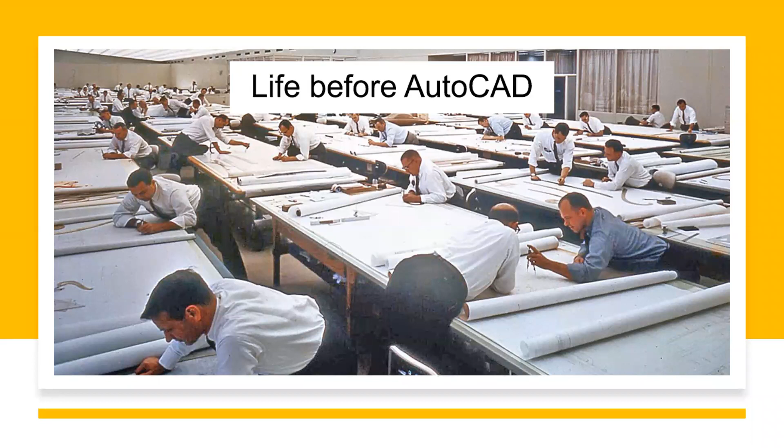So this gave us a solution, that is computer aided drafting, where we started doing all our drafting work with the help of a computer aided drafting software. For example, Autodesk AutoCAD.

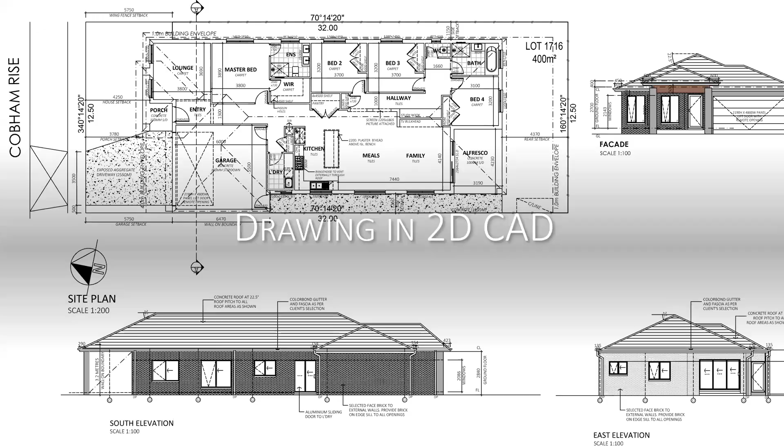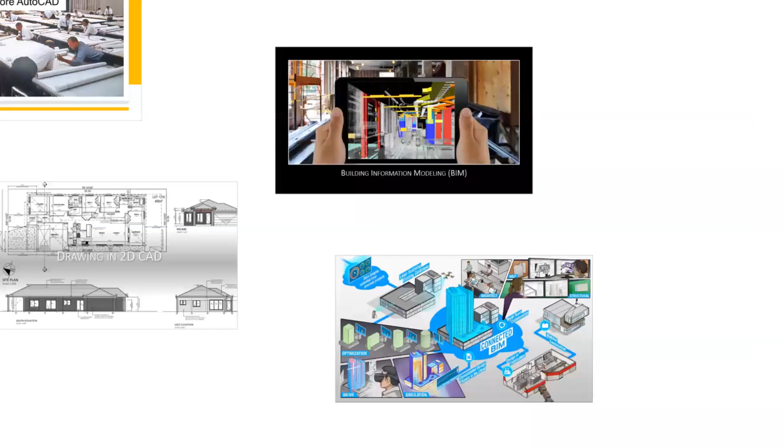So then computer aided drafting software, and then building information modeling. And now we are in a cloud collaborated state of BIM, where everything is connected via cloud itself, starting from design, planning, construction, everything is connected via cloud. So this is the journey of BIM, where we started and where we are right now.

So what is BIM? If you search for the definition, you'll get lots of different answers. Some say it's a software, some say it's a platform, some say it's a 3D model, some say it's a database, some say BIM means Revit. There are lots of answers, but what BIM actually is: building information modeling is an intelligent 3D model based process. This is really important - an intelligent 3D model and a model based process.

So what is an intelligent 3D model? It means the 3D element you create with a BIM tool has all the information about it, and these informations make the model intelligent. It's not just about creating an intelligent BIM model - it's a model based process that gives architects, engineers, and construction professionals the insight and tools to more efficiently plan, design, construct, and manage buildings and infrastructure.

As I said, it's about creating an intelligent BIM model through a model based process, and these informations can be used for other dimensions. So CAD helps people draw, but BIM helps people design, construct, and manage buildings and infrastructure efficiently. This is what BIM is.

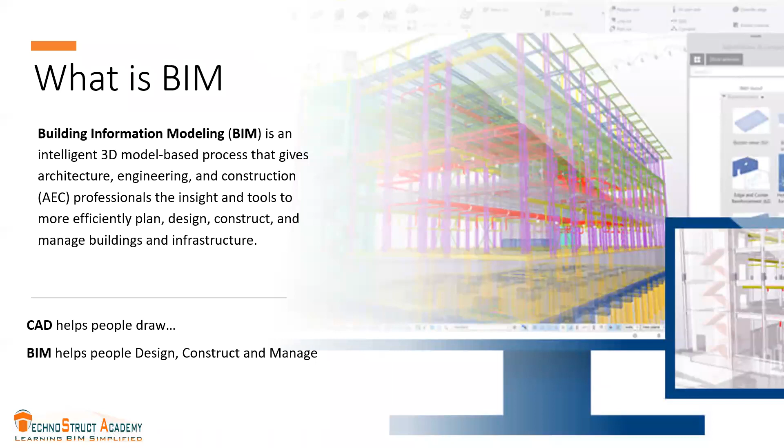In BIM, we are not limited to 3 dimensions - we have n number of dimensions. First is 2D, which is a drawing with 2 axes, X and Y. Next is 3D, a model with 3 axes, X, Y, and Z. But what about 4D, 5D, and other dimensions?

4D means time, 5D means cost, 6D means operation, 7D means sustainability, and 8D means safety. It's not limited to 8D, we have n number of dimensions. In the upcoming slides, I'll explain each of these in detail, but right now, note that we are not limited to 3 dimensions in BIM.

So like the dimensions, we also have BIM maturity level. If you're going to implement BIM in a project, you should know in which level you're going to work, in which level you're going to create your BIM models. That's important. So there are basically 4 levels in BIM: level 0, level 1, level 2, and level 3.

Level 0 BIM means it is not a building information model. It is not even a CAD, just the basic information of a project in the format of paper. That is called level 0 BIM.

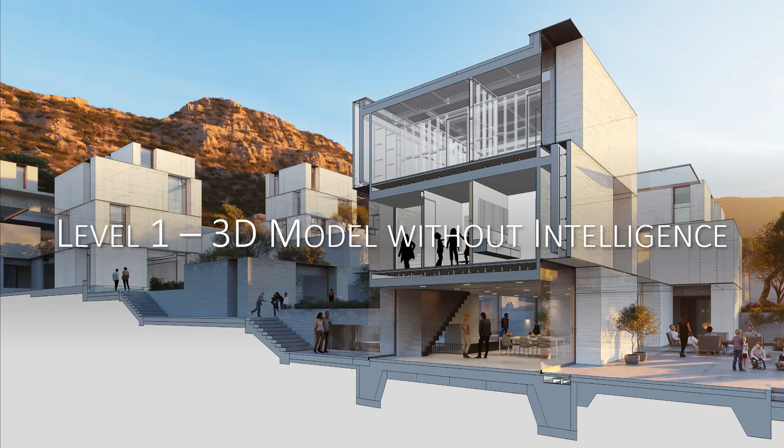Level 1 BIM is a combination of 2D drawing and a 3D model, where the 3D model does not contain any intelligence. This is not a building information model, it's a 3D model used during early stages of the project and for visualization of the finished project. For example, it may be a 3ds Max or SketchUp model, a 3D model without intelligence. So this is level 1 BIM, a combination of 2D and 3D, no information, no intelligence.

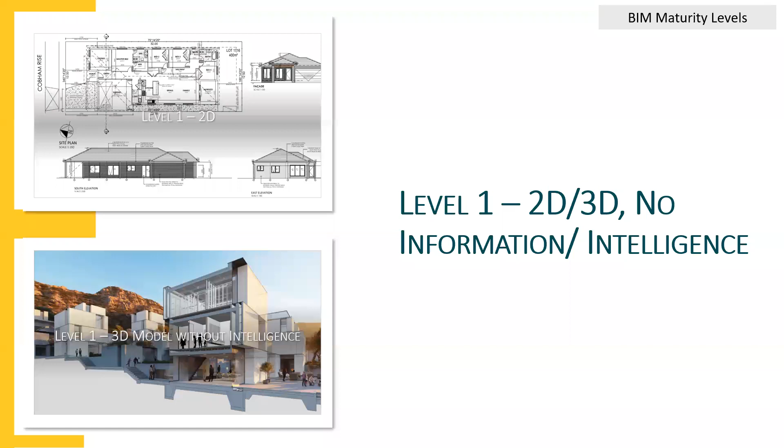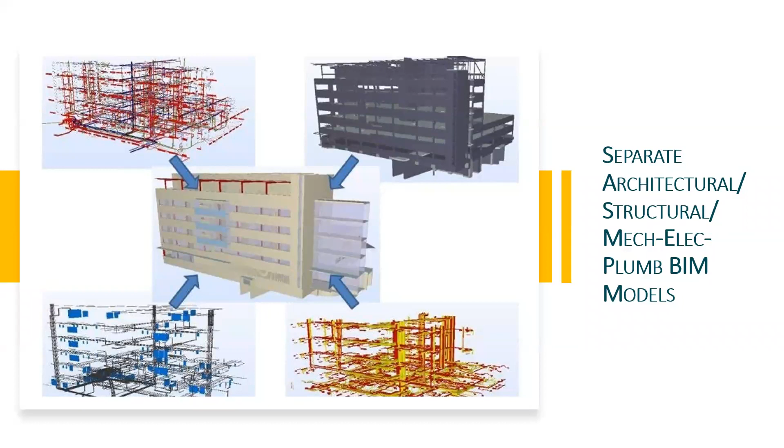Next is level 2 BIM. In BIM level 2, an intelligent BIM model was created for each discipline. So separate BIM architecture model, separate BIM structure model, separate BIM mechanical, electrical, and plumbing model was created. Once created, we combine all those different models into a combined BIM model, or a federated model.

Why are we creating different disciplines separately and then combining them together? The reason is that once we combine the different disciplines of the same building together, we can find the problems and conflicts of the building in the software itself. So what kind of conflicts may we face? Let me show you some real images.

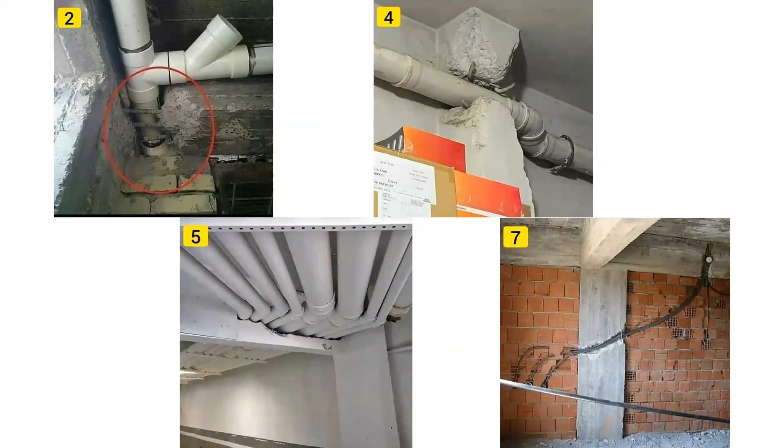Here you can see there are some conflicts between the plumbing pipes and the structures, conduits and all. What they did here is break the columns and beams just to run the pipe. But this will definitely affect the strength of the building. We can't do this, right? But in this case, we don't have any other options because these are plumbing pipes.

Plumbing pipes run with the help of gravity, so we have to maintain a particular slope in the pipe. Only then can we drain all the waste from the building to outside. So in this case, we don't have any other option other than breaking the columns just to run the pipe. But what if you implemented BIM?

What if you have the plumbing model and the structure model of the same project, and when you combine those two models in the software, you can find these conflicts in the software itself? That process is called the clash coordination process. Let me explain briefly how this process happens.

First we design and model in a BIM tool, for example Revit. Then we export our BIM models into another software platform called Autodesk Navisworks. Navisworks is a software used to find conflicts between different disciplines. In Navisworks, we combine every model: architecture, structure, mechanical, electrical, and plumbing models, all together.

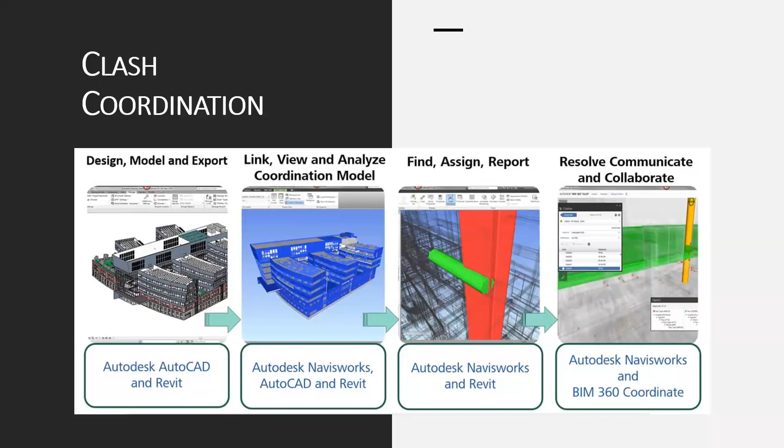Once the model gets clash free, we don't face these kinds of problems on site. There'll be no wastage of material, no extra labor cost, we can save time, save money, and even improve the quality of the building. This is why clash coordination is very important in building information modeling.

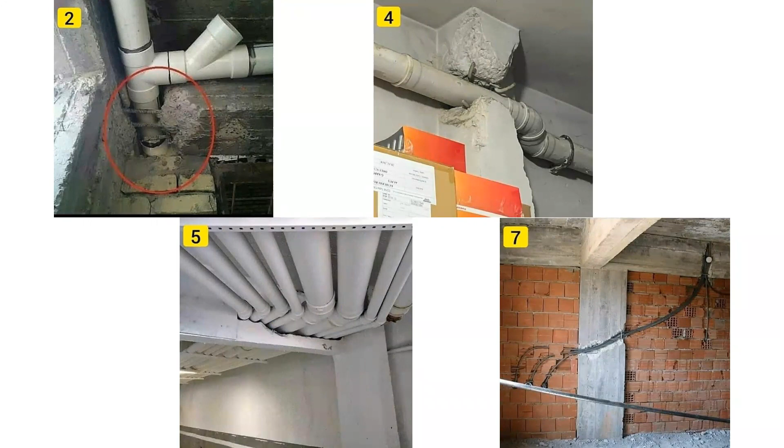Okay, so we combined all the models, we find the conflicts, and we resolved everything in the software itself. Once all the clashes are resolved, we can move to the next dimension that is called 4D.

So as I said, 4D means time. 4D is a way forward when doing detailed planning scenarios and rehearsing the plan. We can rehearse virtually in the office and we can eliminate risk.

So what we are going to do here is combine the clash-free BIM models with the planning data that we get from the planning engineer in the format of CSV, Oracle Primavera, or Microsoft Project. Whatever the format may be, we just combine the schedule and the BIM model and create a construction simulation.

Why are we creating this construction simulation? Because we can plan everything in the software itself. Let's say we're going to pour the slab for level 1 tomorrow - how much time it will take to complete that task, how many laborers are going to work there, how much cost it will take, and what the next task will be after that.

How would you move transportation like materials from one level to another level? Where to place the cranes - everything you can plan in the software itself, because it is better to find a problem with your solution during the planning phase than during the execution phase.

With the help of the simulation, you can also show your client how much the building will get completed after 3 months or after 6 months. You can just go to the particular timestamp and show your client that this much progress will be completed. So this is called 4D construction simulation.

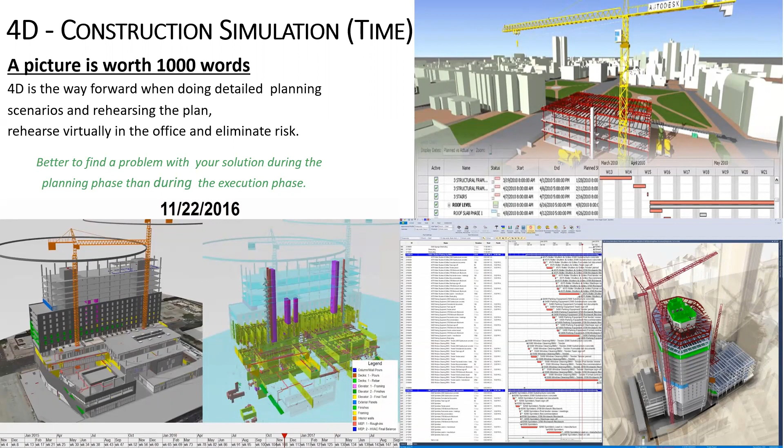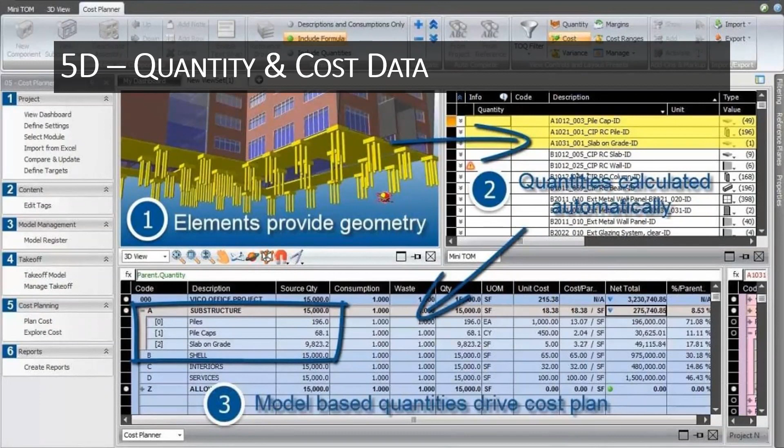Next is 5D. 5D means cost. With the help of your BIM model, you can take precise quantity takeoff of any elements you have created - it may be a lighting fixture, rebar, plumbing fixture, pipe fittings, ducts, windows, walls, whatever you have created with a BIM tool. You can take precise quantity takeoff, and those data can be used for procurement and cost calculation. So this is 5D.

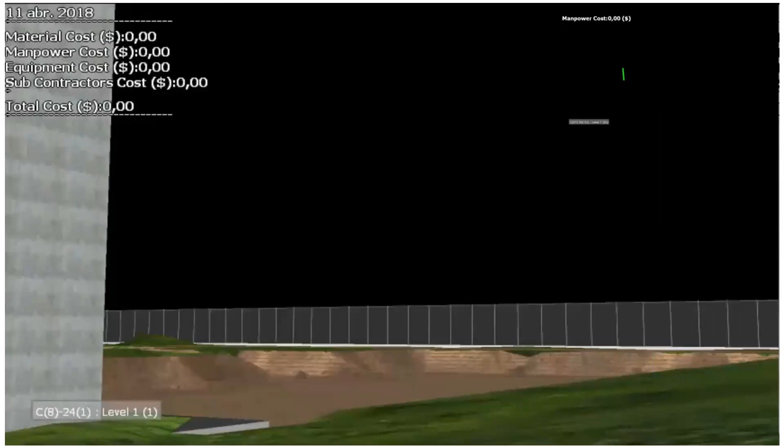Now let me show you a video of 4D and 5D construction simulation. Right now you can see there's nothing in this video, just blank. In the top left corner, you can see the date followed by material cost, manpower cost, equipment cost, subcontractor cost, and total cost.

Once you start playing this video, you can see the building gets completed virtually as the days move forward, and the cost will also increase as the days move forward. So now watch this video.

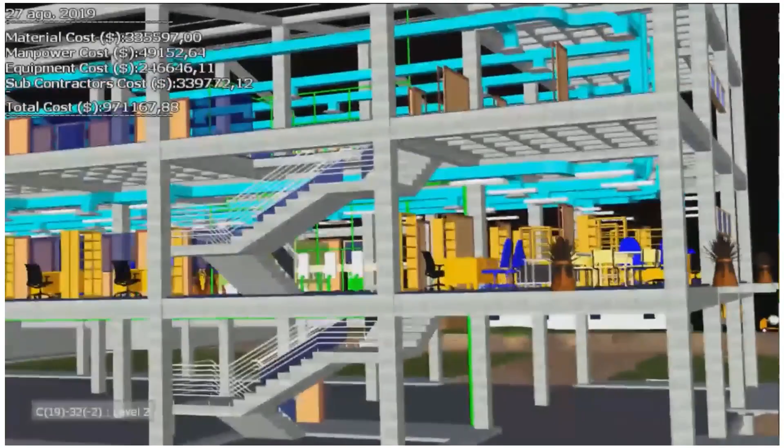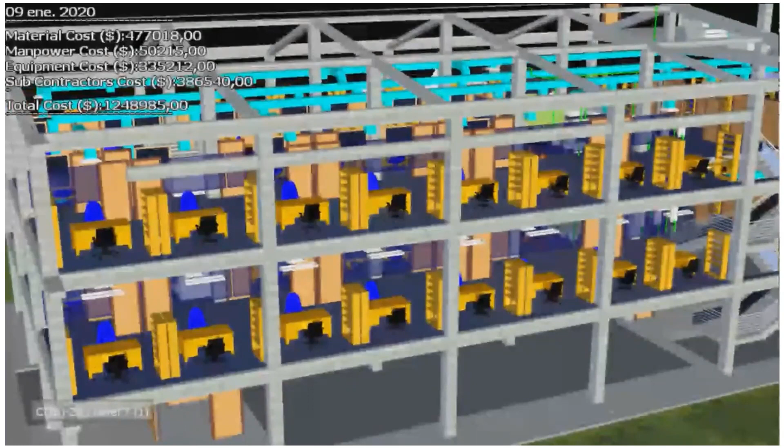Okay, so this is how a 4D and 5D construction simulation looks like. We can plan everything in the software itself - as you can see, even the planning of scaffoldings and cranes and everything we can plan in the simulation itself. So this is 4D and 5D construction simulation.

So after this is level 2 BIM. What we did in level 2 - we create intelligent BIM models for each discipline, we combine those, we solve the issues, then we created 4D and 5D. Next is level 3 BIM.

So BIM level 3 means it is 6 dimension and beyond 6 dimension. What is 6 dimension? 6 dimension means sustainability.

With the help of your BIM model, you can create energy modeling and do energy simulation. You can calculate how much energy a building consumes, the cost related to the consumption of energy, and the net CO2 emission from a building. So all the things related to green building that come under sustainability - that is 6 dimension.

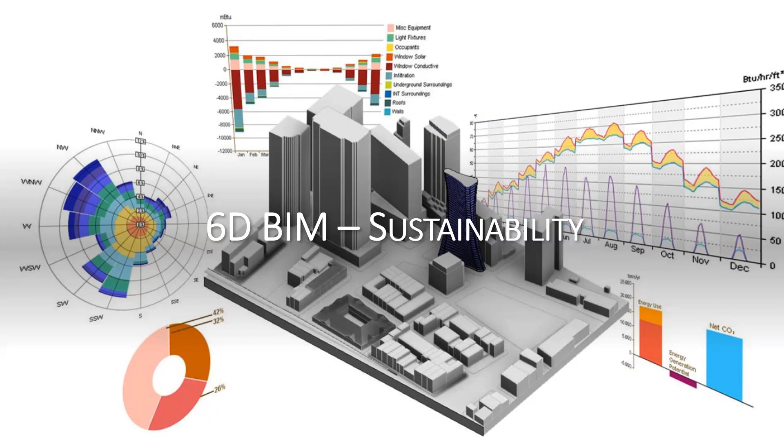And we have other dimensions like 7D that is used for facilities management, which is the operation and maintenance of the building. And we have 8D that is regarding safety and all, and it goes on - there are n number of dimensions. And it's a cloud collaborated process.

So nowadays you're working from home with the help of this common data environment, which is nothing but an online cloud platform. Your client may be in the US, you may be working here in India, you both can work together on the same project at the same time from wherever you are, just with the help of internet and a system. So cloud collaboration and a common data environment - this is level 3 BIM.

So we learned the dimensions of BIM and the levels of BIM. Next, let's see what is point cloud to BIM modeling, or else scan to BIM.

Normally we create BIM models with the help of design drawings that we get from the design engineer, which may be in PDF or CAD format. That is called CAD to BIM or PDF to BIM, but here this is called scan to BIM. So what is scan to BIM?

Scan to BIM is a process which uses 3D laser scanning technology to capture the as-built environment. Here you can see the 3D laser scanning machine. With the help of this machine, we can scan the as-built environment, which is a construction-completed building.

Once we scan the entire building, we get the resulting data in the format of point cloud data. Then we link this point cloud data into the BIM software and create building information models.

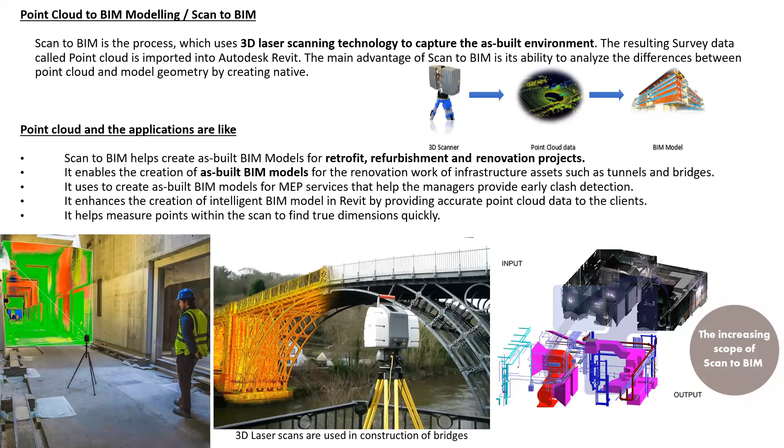Now let me show you a small video about how the scanning process happens.

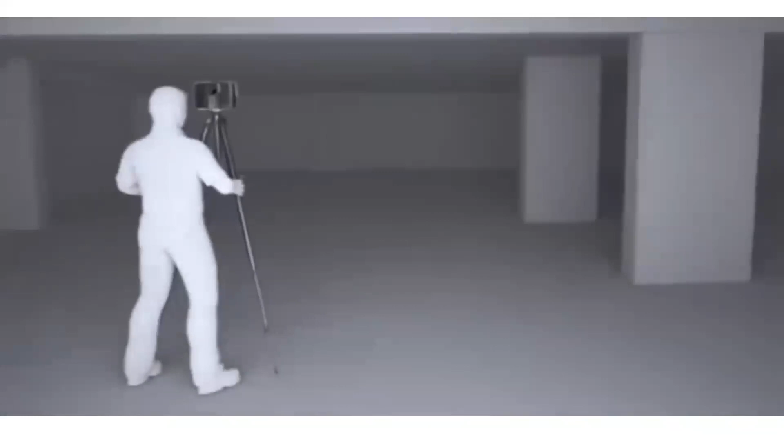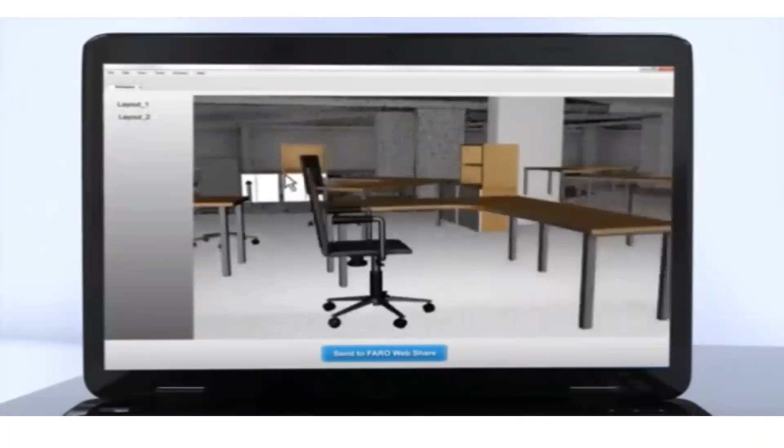The Faro Focus 3D laser scanner is the ideal portable scanning solution for building information modeling, better known as BIM. With the Focus 3D, you can quickly capture the surrounding area to document the complete life cycle of a building in a virtual 3D point cloud. Scan data and project evaluation results can be shared with all construction partners such as architects, engineers, and clients by using the Faro WebShare server. The scan data is saved on an SD card for portable upload to the workstation for detailed 3D measuring and modeling. The 3D point cloud can be exported into various software solutions such as Revit, AutoCAD, Bentley MicroStation, AVEVA PDMS, and many other industry-leading software packages.

So this is how the scanning process happens. It has two cameras, one horizontal and one vertical, and it emits 3D lasers. These 3D lasers convert the real environment into point cloud data.

Next is photogrammetry. Photogrammetry is similar to scan to BIM. It is also a process of extracting 3D information with the help of photographs. Photogrammetry is often used by surveyors, architects, engineers, and contractors to create topographic maps, meshes, point clouds, or drawings based on the real world.

Here we are not using 3D lasers, we are using photographs, with the help of drones or unmanned aerial vehicles. The drone flies over the area and takes thousands of photos. Then we combine all those photos to create point cloud data, which we can later link into software like Revit.

So there are two methods of creating point cloud data: one is 3D laser scanning, and the other is photogrammetry.

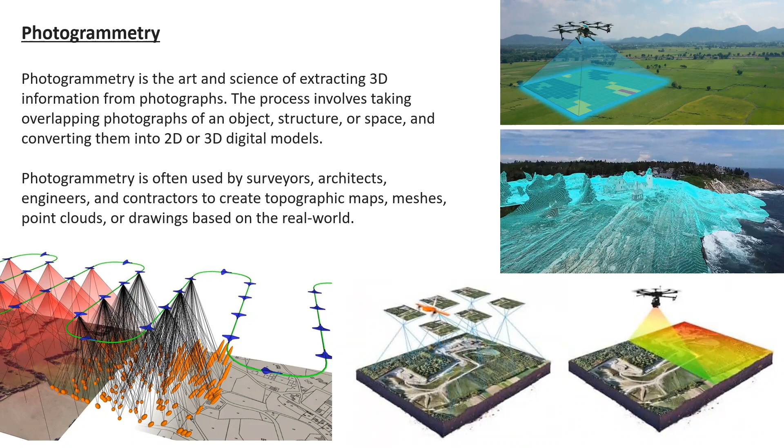Now let's see the 5 innovative trends shaping the future of BIM technology. First is 3D printing, which helps professionals create accurate elements associated with building design in a short while with minimum loss of materials. Second is the usage of drones: project managers and AEC professionals use drones for recording and reporting progress on a construction project.

Third is cloud collaboration — everyone knows what cloud collaboration is, right? We work with the help of a common data environment that is cloud based. Fourth is Internet of Things, IoT. IoT is a really booming technology.

It is used in many industries like manufacturing, medical, and also in construction. It's nothing but connecting all the devices with sensors and controlling them with the help of some algorithms. It is mainly used in facilities management.

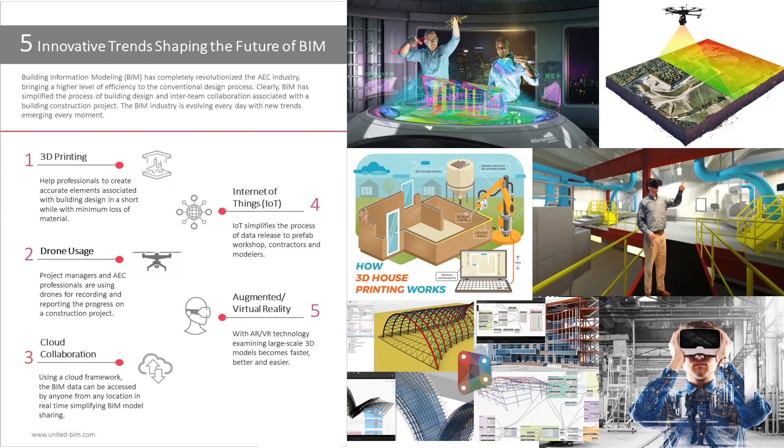Fifth is augmented reality or virtual reality. With the help of your BIM model, you can create AR and VR. So these are the five innovative trends that are shaping the future of building information modeling.

So we covered about BIM. What about the future of BIM engineers? In countries like US, UK, Gulf countries, Singapore, and Netherlands, the demand for BIM skills is rising, and BIM is expected to become standard practice in the coming years. A number of design teams are planning to adopt BIM within the next 3 years.

It won't be long before governments mandate the implementation of BIM in major engineering projects. There's going to be an immense need for BIM engineers globally. If nothing else, this makes BIM one of the highly promising careers for engineers. In short, BIM engineers are going to have a successful career within a short span of 5 years.

With most countries moving towards adopting BIM, engineers should start learning more about BIM. In addition, they should be improving their managerial skills as well if they're looking for a long-term career in BIM.

So what about the future of BIM in India? In today's Indian design and construction space, knowledge of BIM has become imperative. This is even more important now that the Indian government has started mandating BIM for all major development projects like metro rails, airports, train stations, highways, healthcare, smart cities, data centers, etc.

India is a growing economy, and with 11% of its GDP being contributed by the AEC sector, apart from being one of the largest employers, it will inevitably undergo modernization in no time.

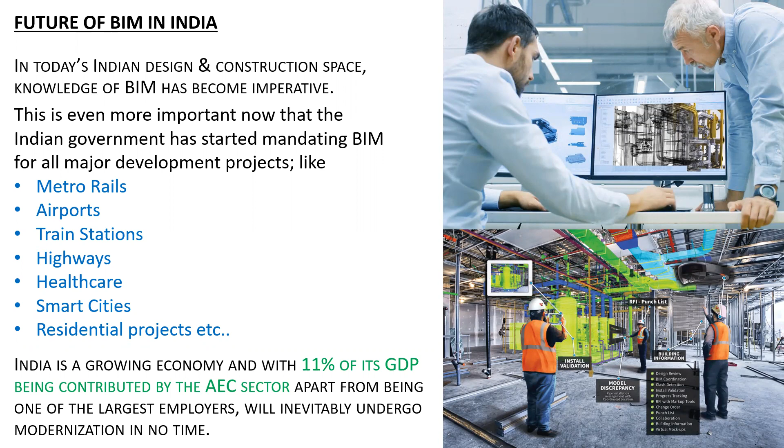Let's look deeper into BIM in India. The central government has planned to introduce the latest building information modeling technology to expedite the construction of overly delayed infrastructure and residential projects. According to a Niti Aayog official, the government's plan to introduce BIM technology would reduce project cost by 20%.

Besides, it would also reduce the construction time of the project. Therefore, the authority has urged all infrastructure ministries to consider this model.

Here you can see I have listed a few projects constructed in India with the help of BIM, like metro projects, airport projects, Statue of Unity, and the new Parliament building being constructed in Delhi by Tata Projects. So they're also using building information modeling.

The executive director of Maharashtra Metro, Mr. Ramnath Subramaniam, said that due to the use of 5D BIM, there would be significant savings in cost and time. Globally, the platform has helped reduce project cost by about 5 to 6%, he said.

Not only in government projects, BIM is widely used in private projects as well. So if you want to know more about BIM in private development in India, you can go to the India BIM Association website.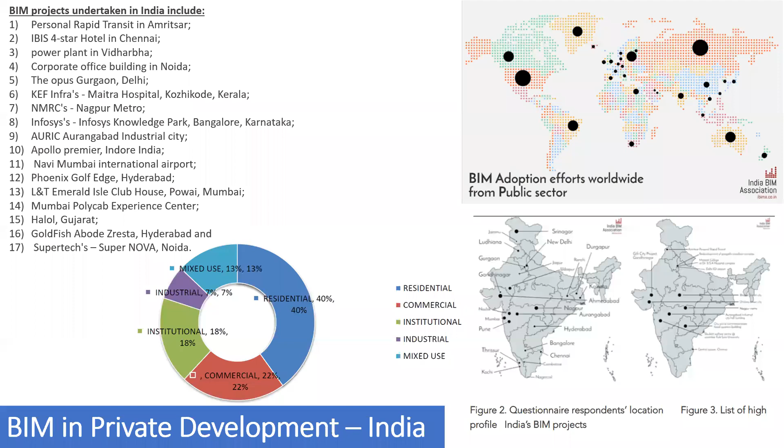So why are we implementing BIM? What are the benefits of implementing BIM? The UK Cabinet Office BIM strategy paper sets out some of the main benefits of using BIM. They're saying there's a 20% reduction in build cost, a 33% reduction in cost over the lifetime of the asset, and a 47 to 65% reduction in conflicts and rework during construction.

This is really, really important. A 44 to 59% increase in overall project quality, up to 43% reduction in risk, improved predictability, up to 40% better performing completed infrastructure, and up to 38% improvement in review and approval cycles. So these are some of the main benefits of implementing BIM in a project.

So we covered BIM, we covered the future of BIM engineers in India and globally, everything. Now let's talk about TechnoStruct.

TechnoStruct is a group of companies spread across various countries. We have TechnoStruct Engineering, which focuses on MEP design, fire alarm, and seismic engineering. Then we have TechnoStruct, which focuses on building information modeling, estimating, and project management. Then we have TechnoStruct Academy, which focuses on BIM education and placements.

So why should you consider TechnoStruct Academy, TSA? Let us understand.

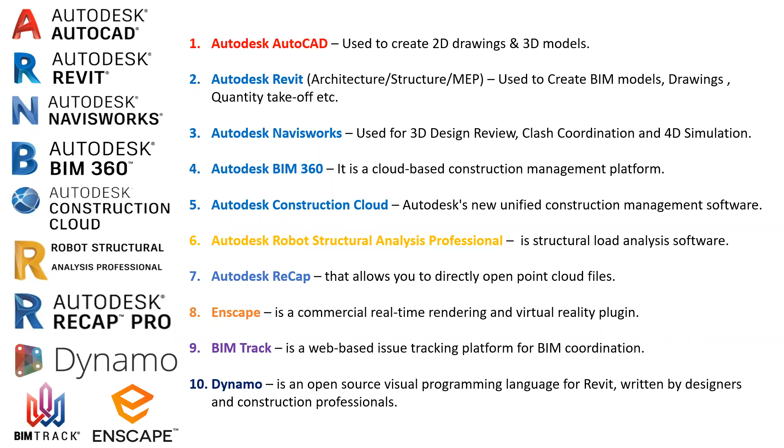First is BIM Ready Complete. The duration of this course is 6 months, that is 120 hours, with 9 modules. The number of assessments is 7, and the methodology is live virtual class.

Who can attend this? Who can apply for this course? You may be an architect, civil engineer, mechanical engineer, or electrical engineer, a student or a working professional. Anyone can apply for this course.

As I said, we have 9 modules. The first three, module 1, module 2, and module 3, cover introduction to BIM, BIM in concept design stage, and introduction to BIM authoring. Module 4, module 5, and module 6 cover BIM in architectural design development, BIM in structural design development, and BIM in MEP design development.

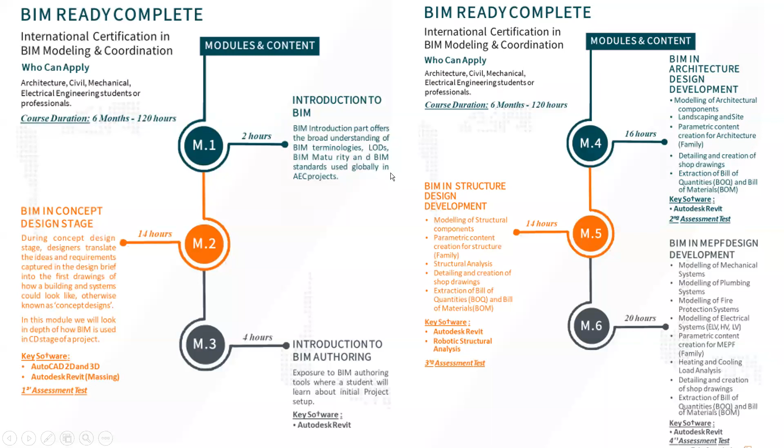At the end of module 6, you will be good with building information modeling of architecture, structure, mechanical, electrical, plumbing, fire piping, everything. Once you're good with the modeling of all the disciplines, in module 7 you will learn how to perform clash coordination between all the different disciplines.

We also have some elective courses. If you're someone who wants to learn only architecture, you can choose BIM Ready Architecture, and you will learn only about architecture. When you choose the architecture course, structure and MEP are not included. If you choose only structure, architecture and MEP are not included. When you choose only MEP, architecture and structure are not included. So these are the elective courses.

Next is BIM Ready Plus, an international postgraduate certification in BIM management. The course duration is 8 months, 160 hours, with 8 modules and 8 assessments. To join this course, you should have a minimum of 2 years of working experience because it's a BIM management course.

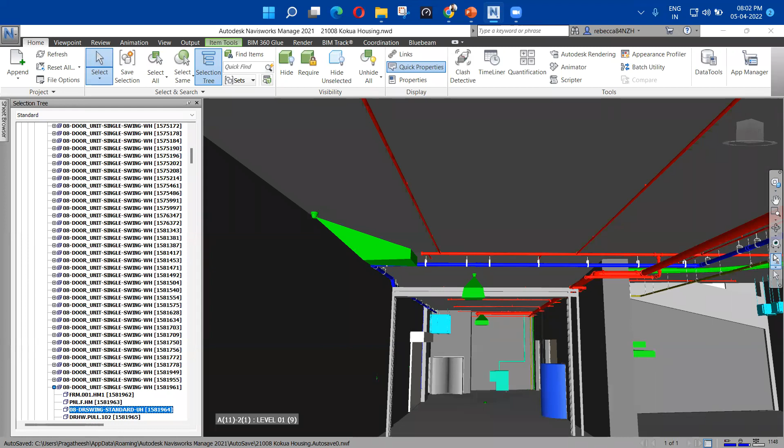Just hold on, right now you can see I'm working on this project. This was a federated model which has all the disciplines like fire piping, water piping, and electrical cable trays, conduits, ducts, condensate pipe, and everything, and also has the architecture and structure model.

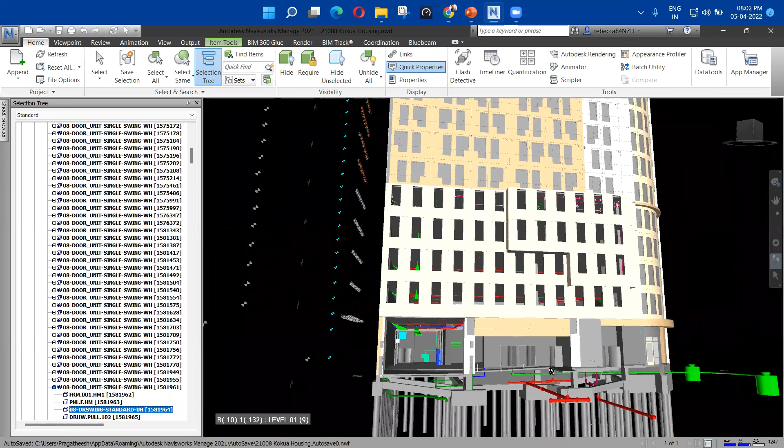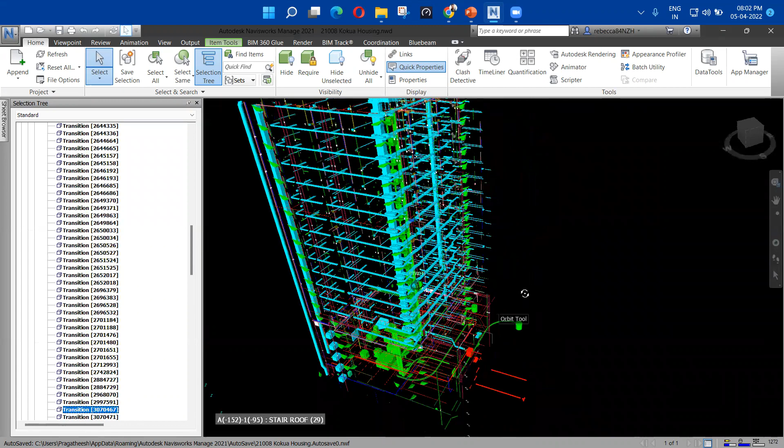So what we do here, let me show you - I'll turn off the architecture and structure model now, and you can see. So this was a federated model where the architecture and structure model is turned off, so we can just fly around the model and find the conflicts. What happens if it's a multi-story building and there are lots of pipes and ducts running inside, just clashing on site - that would be big hectic work, right?

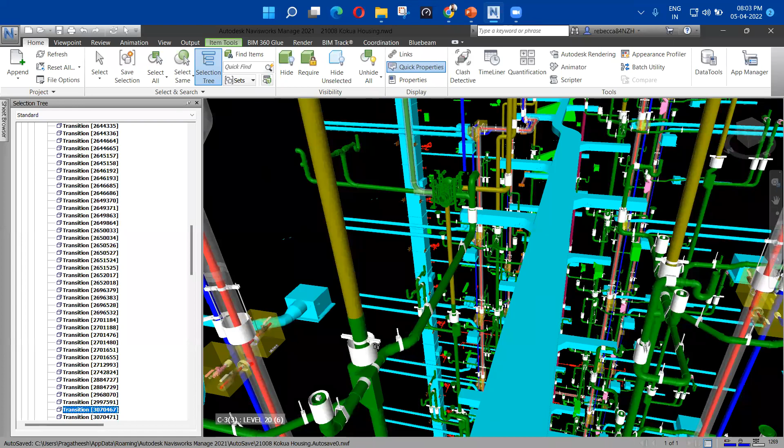So we can basically find all the issues in the software, and resolve all the issues in the software, even the placement of hangers and everything - we can plan it in the software itself. So this is just a quick demo of my ongoing live project.

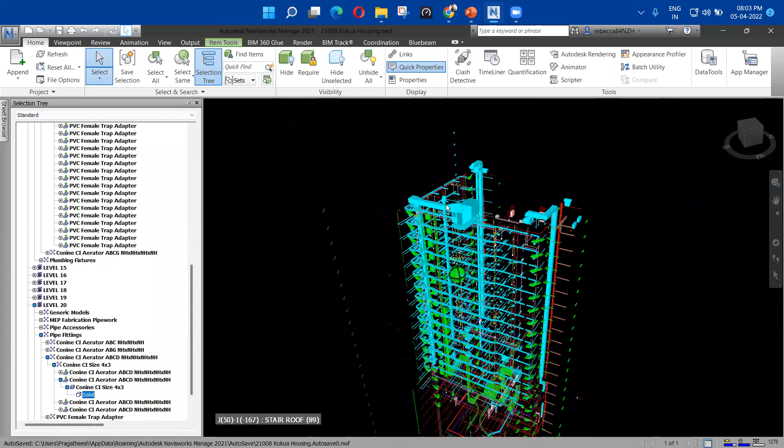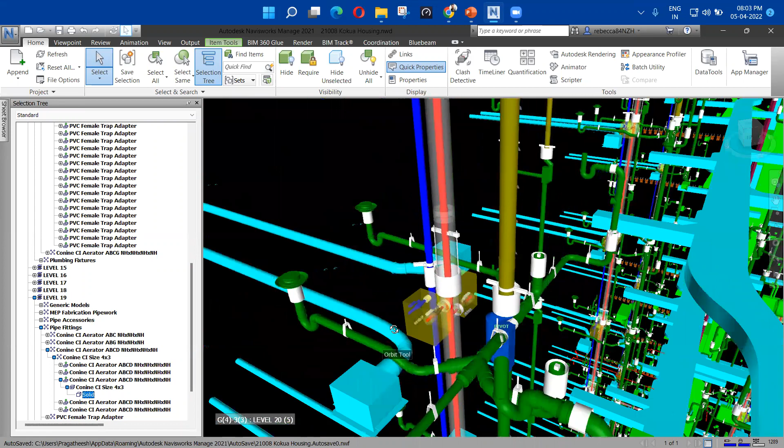And actually you could have seen here, these are different types of plumbing fittings. This is not used in India right now, it's mainly used in the Hawaii province of the US, basically to save space. Normally in a waste pipe we have waste and vent pipes separately, but here we use this fitting called a sovent, which acts both as a vent and a waste pipe, so that we can save one pipe. So that's just a small quick tip.

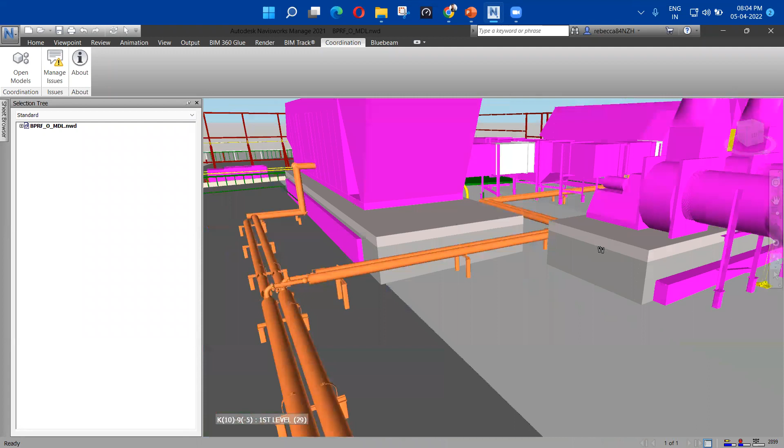And this is also one of the research facility centers I'm working on right now. What you're seeing here is the terrace, and you can see lots of mechanical equipment on the roof, like air handling units, conduits running in the wall, and pipe fittings. Imagine how many clashes will be there - we don't know, right? You can see inside the false ceiling there are lots of pipes and ducts running here and there. We don't know how many issues will be there unless we use BIM here.

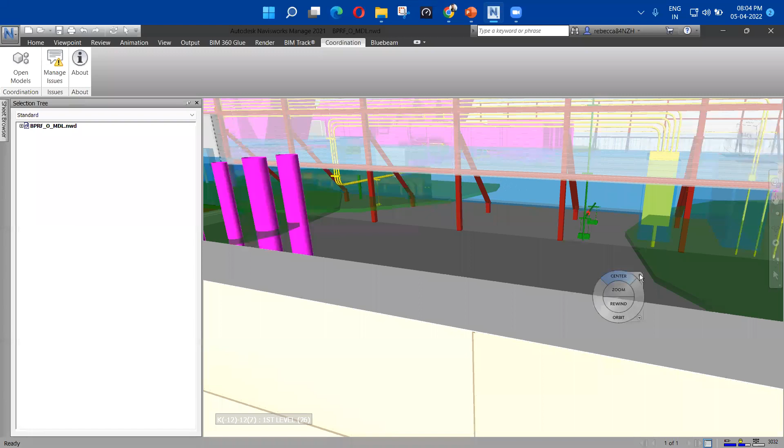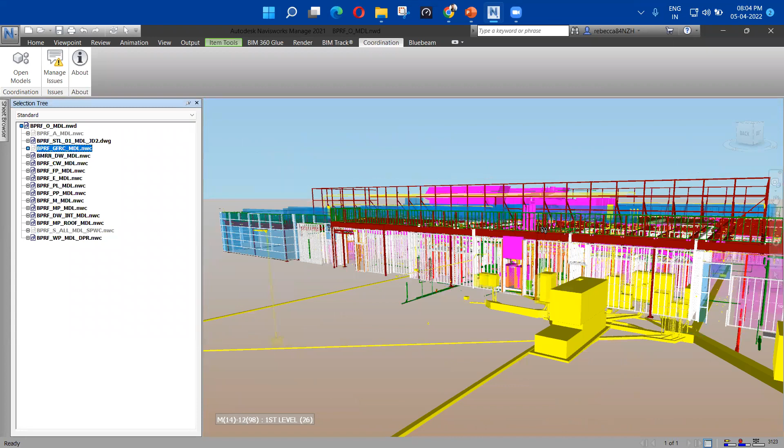So this is a software called Navisworks. As I said, Navisworks is used to find the conflicts in the software, where we combine all the models together. So if we just turn off the architecture model and the structure model, you can see only the MEP models will be there - just the steel structure and the MEP models, no architecture, nothing.